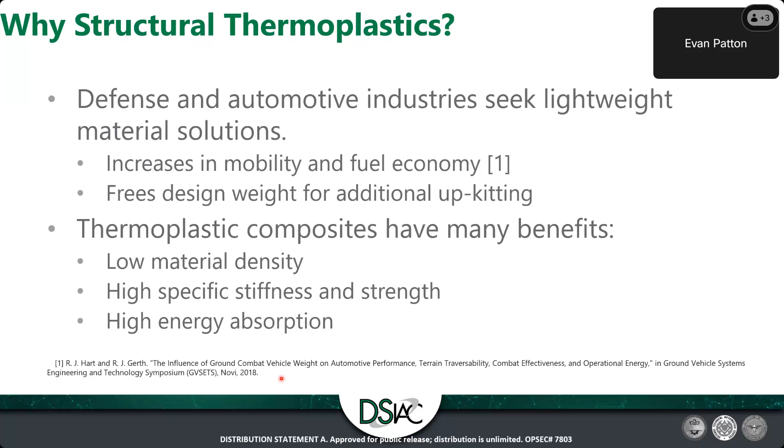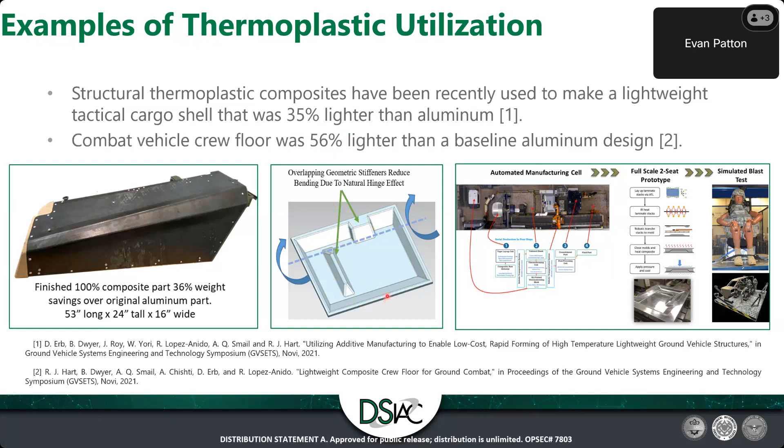In the middle here, we have a theoretical vehicle combat floor. This is just a generic shape, but this is just to show that we can obtain things up to 56% lighter than just a baseline aluminum design. So getting to that point where we actually start prototyping and fielding things, there needs to be some housekeeping stuff. And that's just because thermoplastics can be extremely complex.

Basically, that all kind of stems from the manufacturing process. And in the manufacturing process, we actually introduce a lot of variability within a material. And that's due to the processing temperatures, such as the heating and cooling rates, and that'll define crystallinity within a material. The consolidation pressure as well, that does have some influence on crystallinity, and then the dwell time as well.

And kind of like a subset of the manufacturing specific properties, we have defects such as fiber wash. And fiber wash occurs in a sample when, say, you have a mold with a little bit of air void from maybe a tolerancing issue or things like that. When the resin, in this case thermoplastic, is molten, it'll want to flow and fill that void, and it'll actually drag some of those fibers with it, causing resin-rich and fiber-rich areas, as well as off-axis fibers.

So it's really important to have a manufacturing specific mechanical characterization so you can then feed your finite element models a more accurate representation of the material you're actually using. So this whole webinar and conference was based around a case study where we set to do exactly what it says: manufacture, characterize, and model a thermoplastic composite.

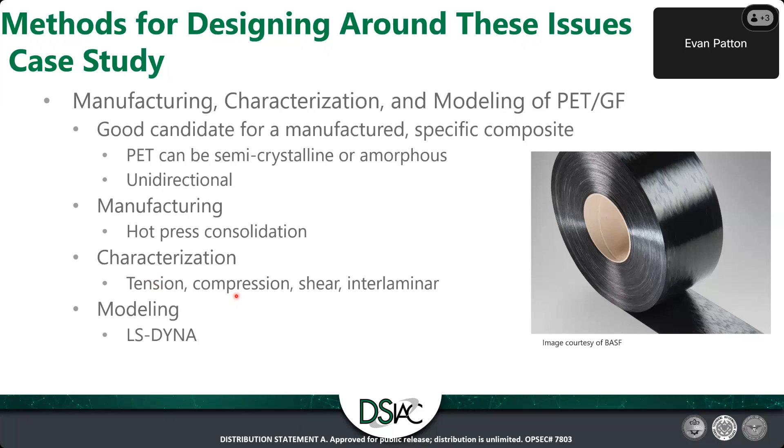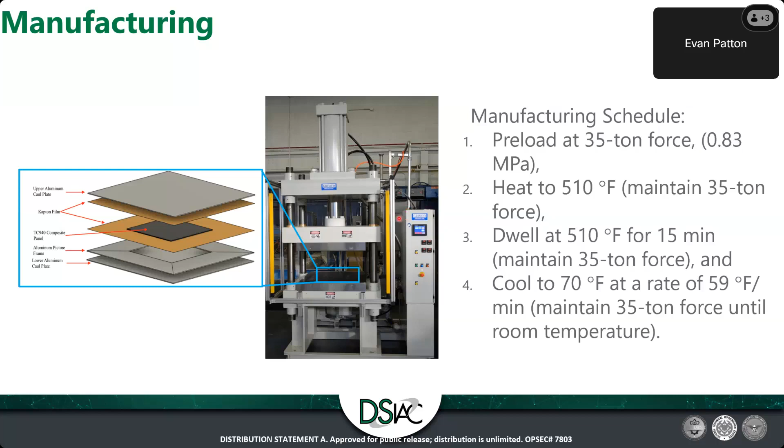That's driven by the capacity of the machine. So that's not by design or anything; it was just a characteristic of the setup that we had. So we just went with it because we weren't doing a crystallinity study on it.

Before I dive too much into the characterization results from the specimens that were pulled from that hydraulic press, I think it's important to highlight the difficulties of dealing with this material. And I shouldn't say it's just prone to this material; it's all composites. But I'd like to highlight specifically that our tension and compression specimens led to a lot of premature failure in the tensile mode. We saw that in essentially shearing in the gauge or in the grip areas from the Instron machine.

The composite was so strong in the tensile direction that it would actually pull on the grips to the point where it crushes the composite in the tabbing area and would lead to a premature shear there. And then there's also an issue with off-axis fibers. I refer to it as almost like piano string, because when you pull these specimens in tension, you can hear plucking from each individual fiber rupturing.

And that's simply due to some of the fibers being under a higher load because of the way it was manufactured. If you think about it from a metal standpoint, you're pulling the entire material at the same time, so it's a very representative sample of what you're seeing. But with the composite, you're pulling on all these fibers, and if some of them are carrying more load than others, it's not necessarily indicative of the load that it's actually carrying or can carry.

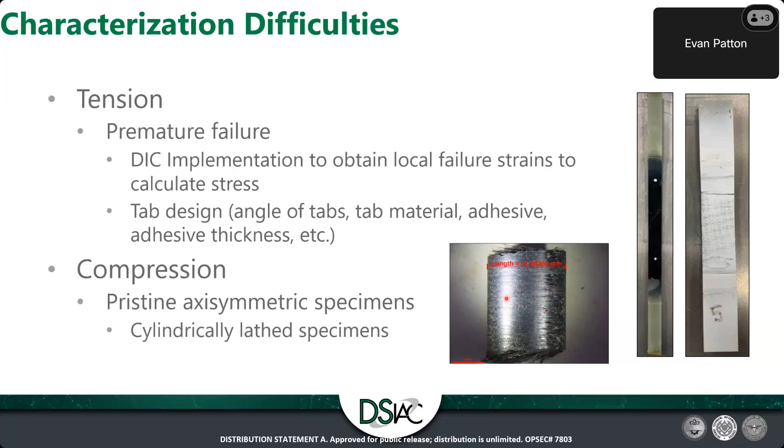So we chucked it up in a lathe just to see how the material would machine down, and we got a really good surface finish on it. It actually machined quite well and led to some good representative samples, which are shown here on the bottom right. These are failed specimens. The one on the left, the fibers are going up and down, and the one on the right, the fibers are essentially coming at you if you're looking at your screen. So we were happy with these failure modes.

And then moving over towards the tensile specimens, the left shows that piano stringing type of failure. Here, the fibers are actually off axis. So as that specimen was pulled, these fibers wanted to straighten out and follow their load path, causing these frayed edges here because the fiber axis was just ever so slightly off kilter.

So to combat that, we did that DIC methodology, as I mentioned earlier, where we looked at the DIC footage and tried to find a really nice representative area where we did have a crack appear across the specimen, even if it wasn't across the entire one. As long as it was across a localized area, we were happy with it. What we saw was a pretty linear response, which we expected, and then all of a sudden a failure.

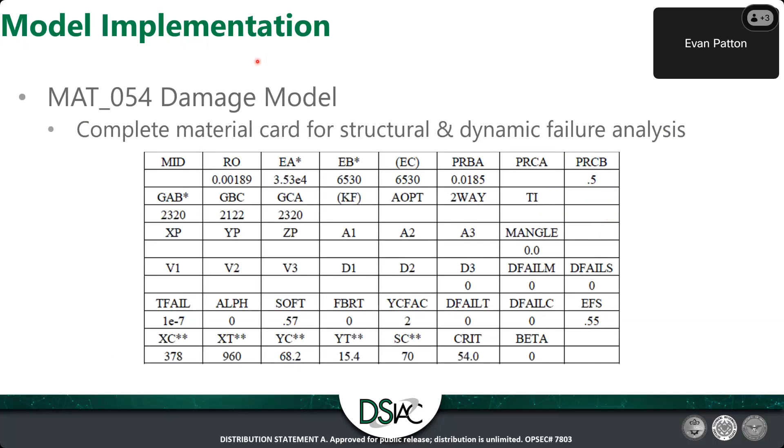And this is the mechanical characterization data we input into the system. Those gray boxes highlight everything that we experimentally derived. Everything else is either a geometric property that tells LS-Dyna which way the fibers are going, or parameters for how the model is going to accumulate damage, and that tunes your model to what you see experimentally. So this model is a representative model instead of a predictive model, although it can get you close if you're familiar with the material and its behaviors.

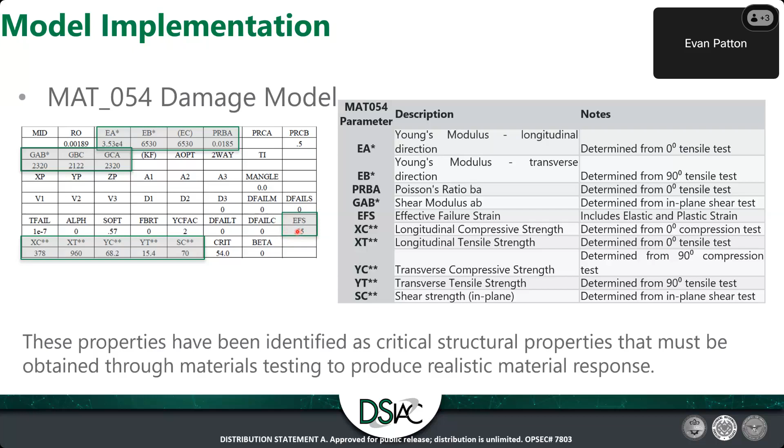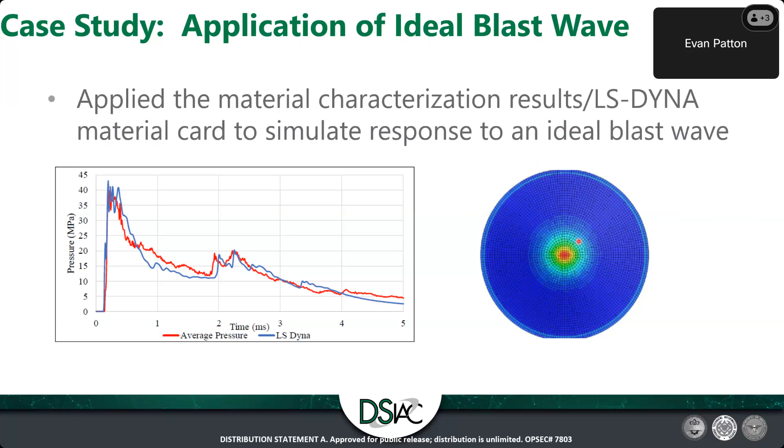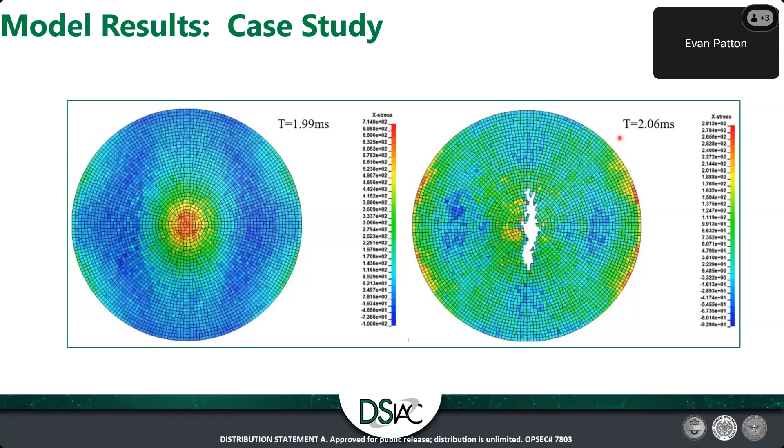And I just thought it was an important point to make, that even though we're past the peak deflection, there's still some damage accruing within the composite, and that just is part of the nature of a high strain event where we kind of have damage even after that initial peak.

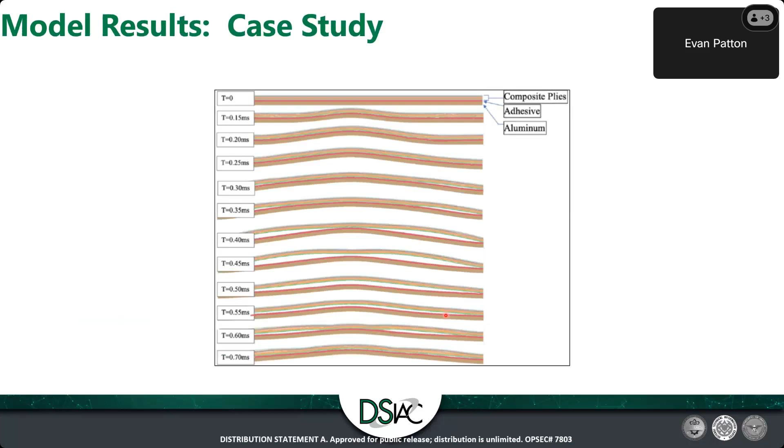And then the element size, I'll go back a couple just to kind of give you a general sense. This is a 7-inch diameter. So that would be, oh gosh, 180 millimeters, I believe. So each one of these elements, I believe, is about 2-3 millimeters. Actually, it is 2.82 millimeters square for the most part. I know some of these are rectangular and triangular, but the general length is about 2.8 millimeters.

Okay, gotcha. Well, and a question just came in kind of on the topic, the simulation part at least. Does the correlated material card performance hold when you're applying it to a larger mesh size to be used in a full vehicle simulation? That's kind of the tricky part, because if you're dealing with a larger element, that element's going to erode if it hits quote unquote failure.

So obviously there's going to be some kind of mesh sensitivity, especially when you're talking about damage and what kind of damage you're expecting. In this case, we didn't really know what we were expecting, but from a 3 millimeter mesh size, we figured that would be very representative of a localized area of damage. But for a vehicle, obviously computation's a huge concern with how large the area is. And I think for a vehicle case study, you're going to be looking at more of an individual component rather than an entire vehicle, solely for that reason.

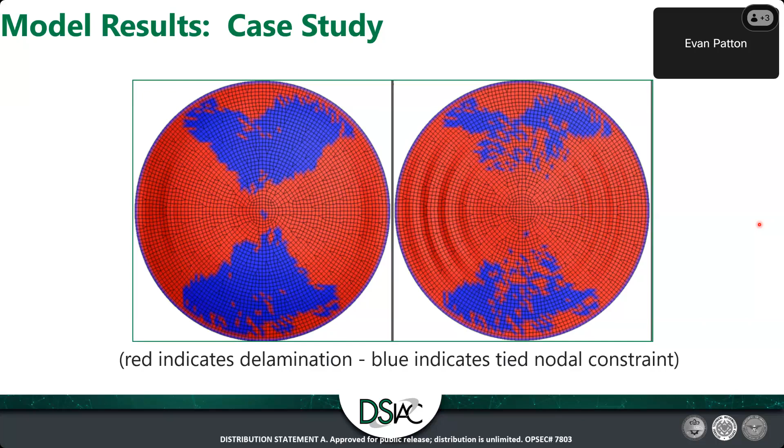So we weren't trying to idealize the material by any means, whether putting it under vacuum to pull out any voids. It was just kind of left as is. But from these images, we were pretty happy with how the composite was manufactured. So we kind of just left it as is.

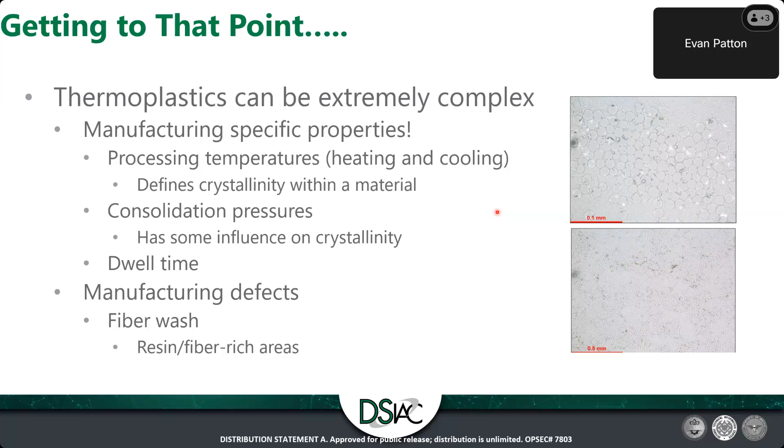Okay. And we just got a question somewhat related to that, asking if you had any challenges with the bonding or the joining of the thermoplastic composites for your applications. Yeah, this material was pretty tough. I shouldn't say tough to manufacture because it was actually quite easy. Its interlaminar properties are relatively low, and I wish I did have the normal and shear values that were obtained here.

I think the normal, so essentially this was just a butt joint where it was a rod of material that was pulled. And this is through the thickness. So you're pulling essentially the plies apart. And that was only about 4 megapascals.

And then we did a lap shear joint, which was actually trying to test the adhesive used to bond the aluminum to the composite. It was a lap shear joint to see that strength, and we were trying to get the interfacial strength from the composite, and it actually sheared in the composite. So the interfacial shear strength of the adhesive in the composite was stronger than the actual composite with itself.

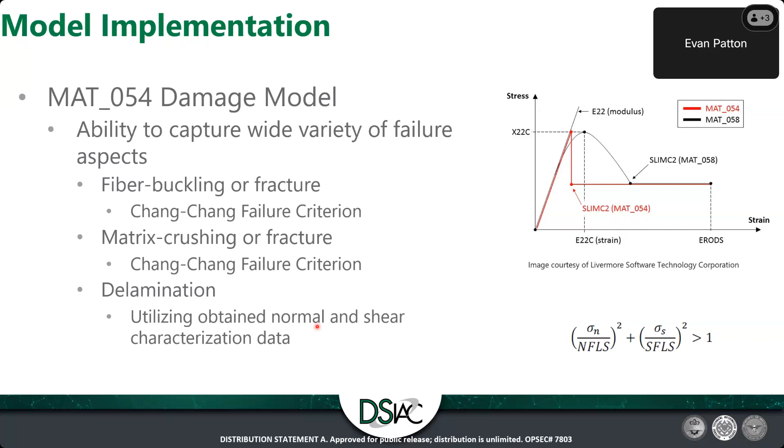So that was one of the tricky things with this material, and that's partially due to the unidirectional nature of it. You know, there's such a high difference in the anisotropy within the material. Your x-axis is much stronger than your y-axis, and you can pretty much see that in these properties here, the moduluses and the failure strengths. So that made it pretty tough to deal with. Gotcha. Okay.

Thank you. Let's see. Could you speak to any efforts that you might be undertaking to evaluate, either by measuring or modeling, the spectral signatures of the materials, maybe the infrared in particular? So our group doesn't necessarily assess any of that. I believe we have a survivability group, and they'd be the ones looking at that assessment. So I don't know if Rob wants to speak anything on that.

Yeah, sorry. We are not actively investigating signature on these materials. The specific material Evan is working on, and some of the other ones, like I mentioned, PPS composites, we are looking at for interior applications. So signature is not as critical there as it would be, obviously, for an exterior structural application. Okay. Fair enough.

All right, let's do one more question, then one big one that I have to get to before the end, and I don't want to forget it. Next question that came in was asking if you could speak to the test setup for the compression testing, and then following was saying, do the laminate designs have strain rate sensitive performance like other plastics?

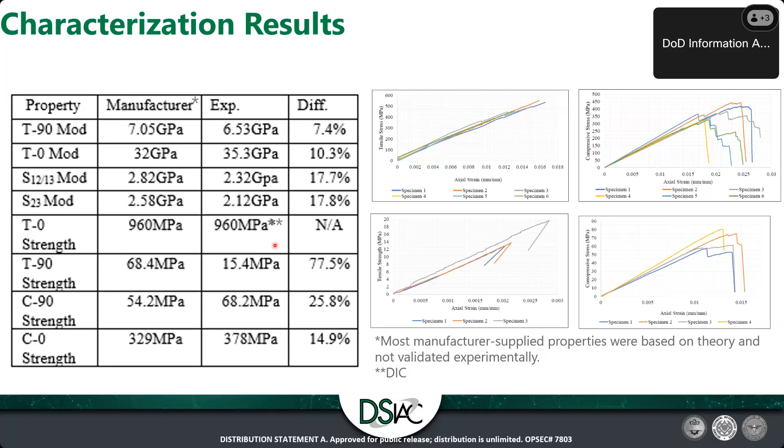Yeah, so for the compression test, it was pretty simple. It's an unconfined compression test. So essentially, these specimens here are loaded between two platens, kind of like you saw in the hydraulic press, and it's squished between those two flat faces. And there's obviously a load cell in which you obtain all of the mechanical data.

And then as for strain rate dependency, this particular material has not been assessed for strain rate dependency. But what we are seeing is that a lot of similar polymers and fiber matrix systems are experiencing some strain rate sensitivity, especially when you start getting in the order of magnitudes of those seen in a higher strain rate event, like a split Hopkinson bar and things like that. All right, okay.